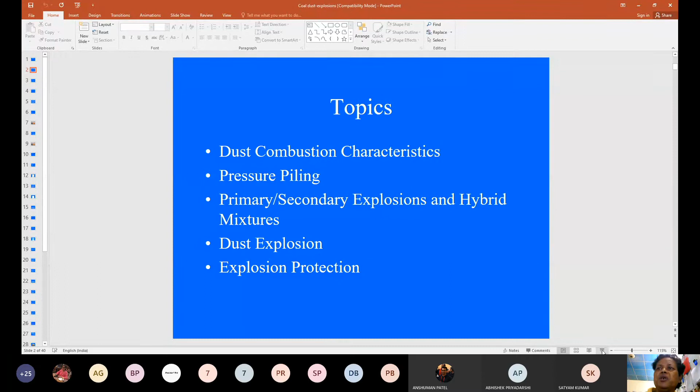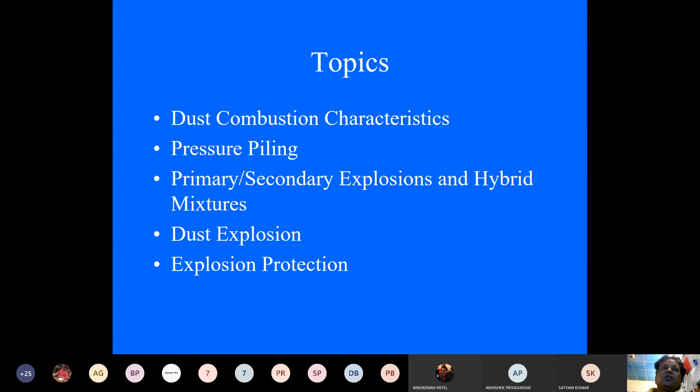So dust explosion characteristics or dust combustion characteristics, pressure piling, then primary and secondary explosions and hybrid mixtures and dust explosion, then explosion protection. So what are the characteristics of dust combustion? Whenever dust is going to be combusted, it has got some characteristics. Before studying dust combustion or explosion, let us define what a dust is. What do you mean by dust? Dust particles. Definition of dust particles.

It is nothing but a finely divided powdered solid less than 420 micron size. If the dust particles are less than 420 micron size, they are called dusts. A finely divided powdered solid less than 420 micron size is called a dust. That is the largest particles that will pass through a standard US 40 sieve.

So in a mineral processing laboratory, you must have seen there are different sizes of sieves. We use sieve shakers to characterize the particle size. So there are different sizes of sieves through which the particles can pass. So in the case of a dust, the largest particles that will pass through a standard US 40 sieve are called a dust. It is the definition of dust.

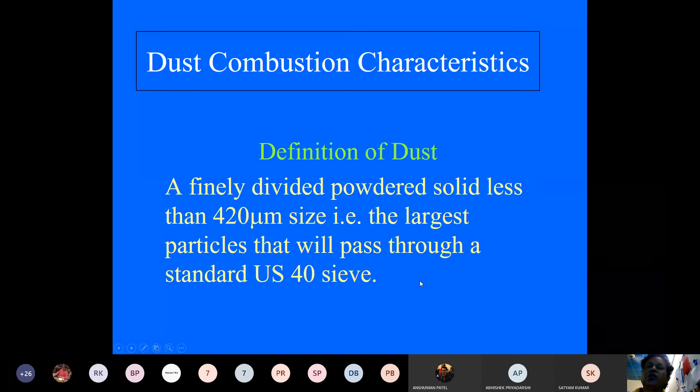A finely divided powdered solid less than 420 micron size means the largest particles that will pass through a standard US 40 sieve are called a dust. This is the definition of dust.

So which dusts can burn explosively? What are the different types of dusts which burn or explode? Every dust is not going to explode. Explosion takes place for a particular type of dust. So which dust can burn explosively? Materials which, if finely divided and dispersed in the mine air atmosphere, can burn explosively. For example, coal dust particles which are very finely divided and dispersed in the mine air atmosphere can burn explosively.

So the different types of dusts which burn are, first, your organic materials like coal dust. Coal dust is an organic material dust. And there are other types of

metals, many metals like your iron, aluminum, zirconium, titanium. These dust particles are also explosive in nature. They can be combusted. So many metals like your iron, aluminum, zirconium and titanium, they are also explosive in nature.

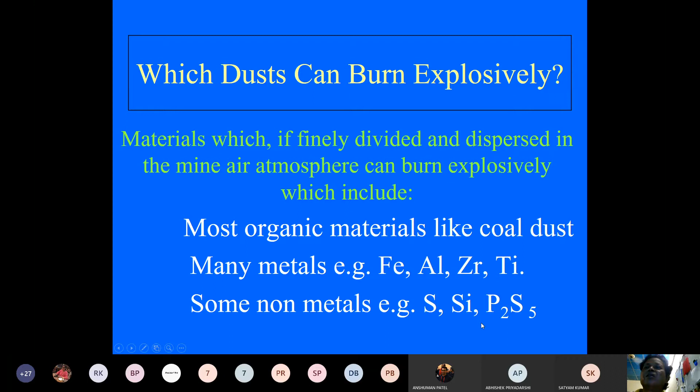And there are some non-metals like your sulfur, silicon, P2S5. They are also explosive in nature. So, what is the nature of dust explosion? Whenever there is a dust explosion, how does it occur? What is the nature of dust explosion?

Generally, they are deflagrations. Coal dust explosions are nothing but deflagrations. That is, the flame fronts propagate into the unburned cloud at a subsonic speed by a combination of heat and mass transfer. So, what do you mean by dust explosion? It is nothing but a deflagration.

Means the flame propagates into the unburned cloud. If the flame started from one end, it will pass on to the other end wherever there is a cloud of dust, and the speed of propagation is subsonic, and it is associated with heat and mass transfer.

So whenever there is an explosion, temperature is going to rise, heating will take place, and there is a pressure change also. Pressure and temperature are going to change in an explosion area. So the maximum pressure is approximately 8 times the normal pressure. The maximum pressure attained by a dust explosion is 8 times the normal atmospheric pressure.

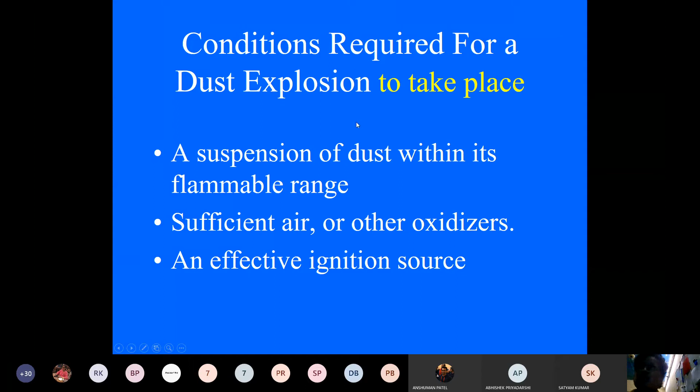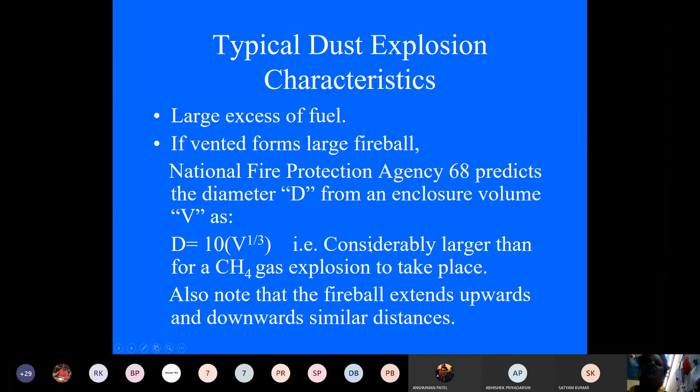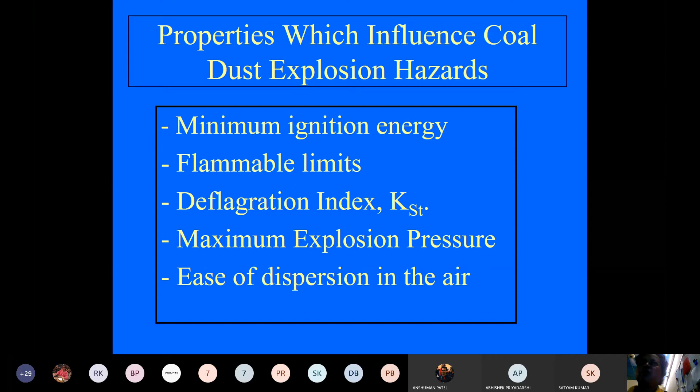Then ease of dispersion in the air. The coal dust should be easily dispersed in the underground coal mine atmosphere. If these characteristics, properties are there, then coal dust explosion hazard will be there in your mines.

So let us see what is the minimum ignition energy needed for the coal dust explosion to take place. The minimum ignition energy of a coal dust cloud depends on many factors, including coal dust particle size and chemical composition of the coal dust. So the coal dust may not be fully coal dust itself. There may be some associated dusts also, like stone dust.

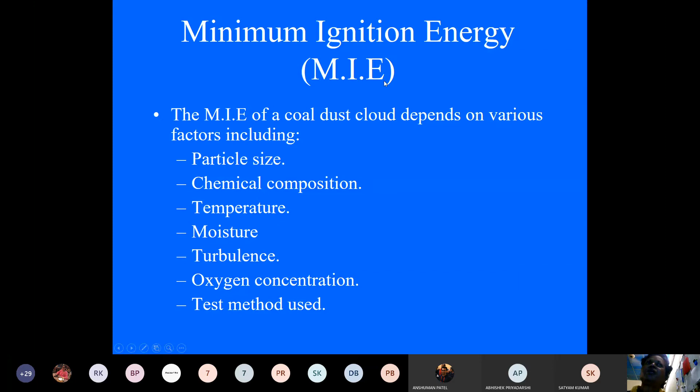So chemical composition of the coal dust, temperature of the mine atmosphere, moisture content in the coal dust, turbulence, very important, whether the dust is stable floating in the mine air or it is just fluctuating from one place to other place, and oxygen concentration, how much oxygen is there inside the mine atmosphere. These are the factors which influence the minimum ignition energy.

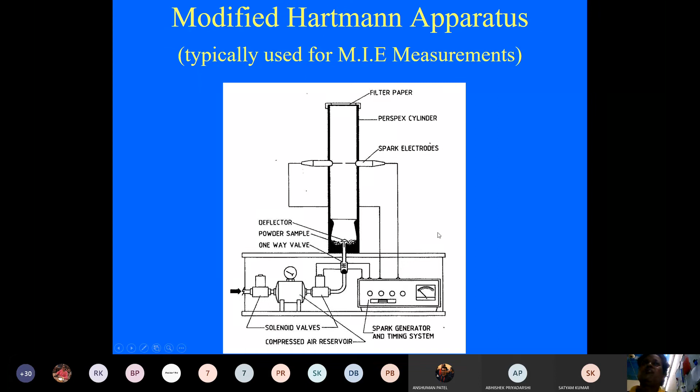So from this experiment, you can determine or measure what is the minimum ignition energy necessary for the coal dust particles to explode. This equipment is called the modified Hartmann apparatus, and the minimum ignition energy is calculated by performing this experiment. So this is the principle of action of the modified Hartmann apparatus.

So what is the effect of particle size on minimum ignition energy? In general, coal dust with particle size above 400 microns will not ignite. If the coal dust particle size is more than 400 micron, or 0.4 millimeter, bigger particles are not going to be ignited; they cannot be exploded. If the particles are greater than 0.4 millimeter diameter, dust explosion will not occur. Remember this size.

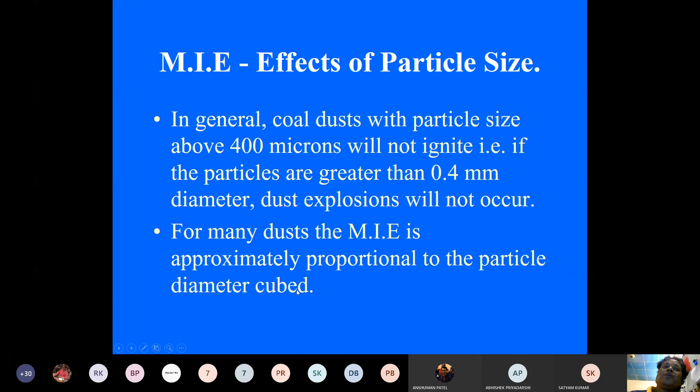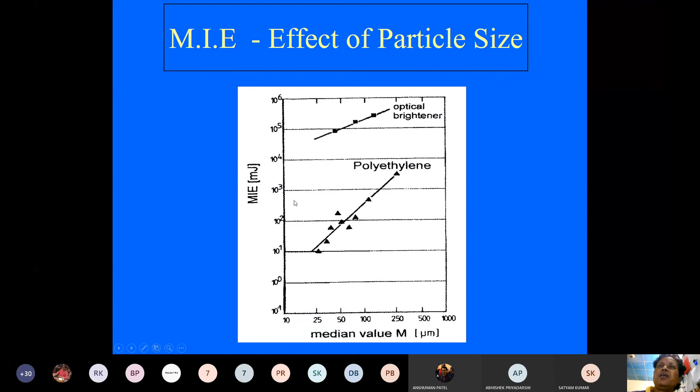For many dusts, the minimum ignition energy is approximately proportional to the particle diameter cubed, that is, particle diameter to the power 3. So this is the graph you obtain for the effect of particle size on minimum ignition energy. On this axis is minimum ignition energy, on this side the median particle size in micrometers, and you get a curve like this.

So what is the effect of temperature on minimum ignition energy? In the laboratory, experiments are conducted at different temperatures: ambient, meaning 25 or 26 degrees, then 50, 90 and 180 degrees centigrade. Lycopodium dust is used in the laboratory to determine the minimum ignition energy. At ambient temperature, the minimum ignition energy necessary is 90 millijoule.

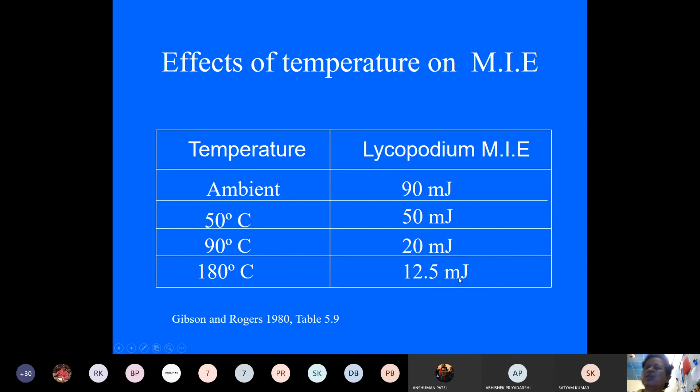At 50 degrees centigrade it is 50 millijoule, at 90 degrees centigrade it is 20 millijoule, and at 180 degrees centigrade it is 12.5 millijoule. So as the temperature increases from ambient 25 degrees to 180 degrees centigrade, the minimum ignition energy decreases. At a higher temperature, you need less energy to ignite. So this is the relationship between minimum ignition energy and temperature.

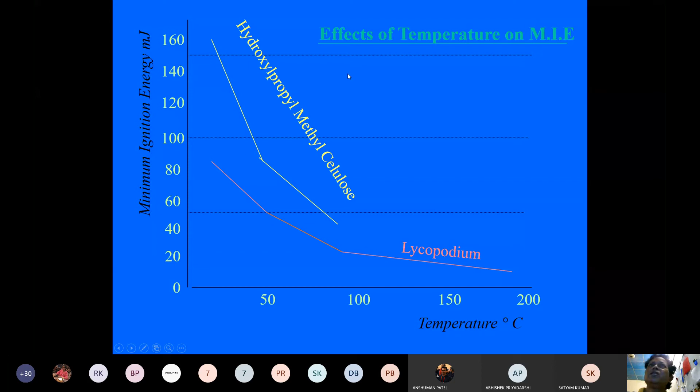So as the temperature is going on increasing, the minimum ignition energy is going down, decreasing. This is the relationship between temperature and minimum ignition energy. That is the effect of temperature on minimum ignition energy.

Then what are the effects of moisture? You know that moisture is present in the mine atmosphere, in the dust. The coal dust is clouded because of the moisture content in it. So if the coal dust contains moisture, what will happen? If in the coal dust particles you increase the moisture content, it will increase the minimum ignition energy value also. If you increase the moisture content, you need more minimum ignition energy.

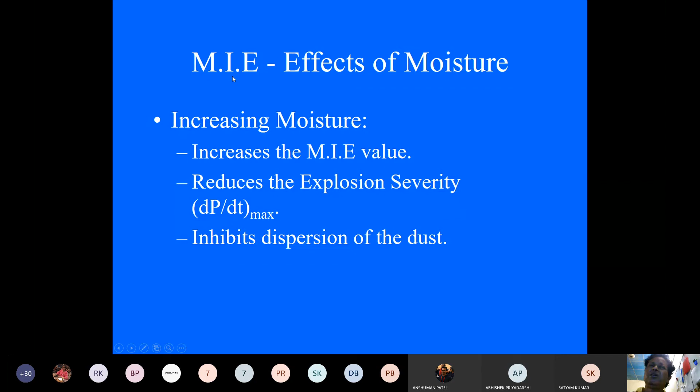It will reduce the explosion severity. If moisture content is increasing in the coal dust particles, it will reduce the explosion severity, and it inhibits dispersion of the dust. It will not allow the dust to disperse. That is why explosion severity will be less if there is more moisture. This is the relationship between minimum ignition energy and moisture.

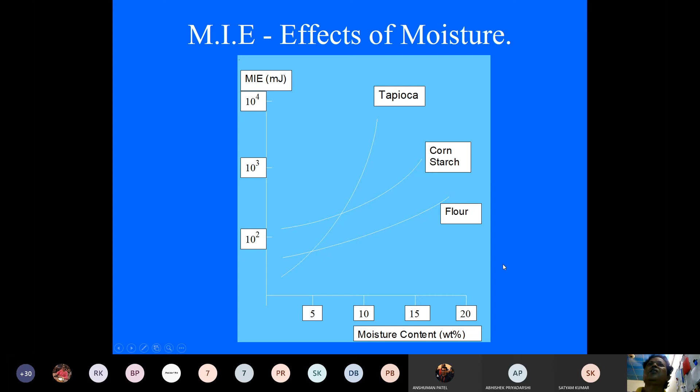So what is the effect of turbulence? I have told you that if the dust is not moving, fixed at a particular place, that is called a fixed dust. But if the dust is moving hither and thither, up and down, right and left, forward and backward, then turbulence is there. The dynamic dust. Dust is dynamic in nature. It moves from one place to other. That is the turbulence of the dust.

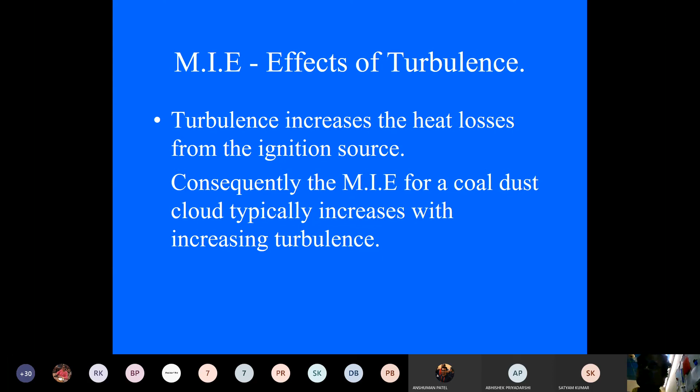So what is the effect of turbulence on minimum ignition energy? If the turbulence increases, there will be heat loss from the ignition source. That is why if the dust is in a turbulent stage, the minimum ignition energy will also increase. If turbulence increases, there will be heat loss, so you need more energy to get the dust ignited. Consequently, the minimum ignition energy for a coal dust cloud typically increases with increasing turbulence. This is the relationship between minimum ignition energy and the turbulence.

So then, what is the relationship between minimum ignition energy and oxygen concentration? You know that oxygen is necessary for the ignition to take place. Without oxygen, the coal dust is not going to be ignited. Three conditions are to be fulfilled for the explosion to take place. One is coal dust in a suspended stage should be there. Second, oxygen or an oxidizing agent should be present. Third, an ignition source should be there for the explosion to take place. So what is the relationship between minimum ignition energy and oxygen concentration?

Most coal dusts will not burn if the air pressure is reduced below 50 millibar. If the air pressure is less than 50 millibar, coal dust is not going to burn, not going to get fired. So you need a certain amount of pressure for the coal dust explosion to take place. If it is less than 50 millibar, there will be no explosion.

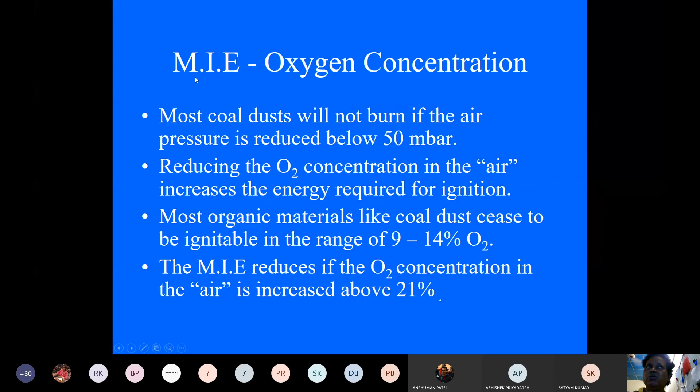It cannot get ignited. You need more oxygen for the ignition to take place. Therefore, the minimum ignition energy reduces if the oxygen concentration in the mine air is increased above 21%. Oxygen level should be 21% in the mine atmosphere for the explosion to take place, or the minimum ignition energy necessary will be reduced. For minimum ignition energy necessary for the explosion to take place, there should be a 21% oxygen concentration in the mine atmosphere. So this is the relationship between minimum ignition energy and oxygen concentration in the mine atmosphere.

So this minimum ignition energy testing is done, measured in the laboratory by Hartmann apparatus. This is measured by a standard which is called the ASTM standard. What is ASTM? American Society for Testing and Materials. So the coal dust is to be tested in the laboratory as per the standard to measure the minimum ignition energy of coal dust.

It suggests that 3 different electrical circuits will be there, and permits some latitude in the choice of electrodes. So you know that this electrode is necessary for the ignition to take place. By the help of this electrode, you are going to fire the coal dust. For that purpose, you need an electrical circuit. The spark energy will be given by the help of this electrode. A fire will be generated for the coal dust to ignite. This can result in significant variability between test laboratories.

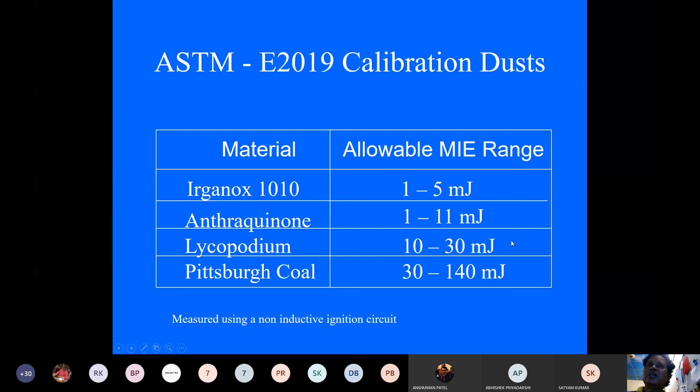So in the next class, we are going to discuss the flammable limits. Today, we have studied coal dust explosion in the mining environment. This coal dust is a very, very dangerous dust in the coal mines. If there is coal dust present in your mine atmosphere, it will affect the health of the people working in the mines. They will develop lung diseases like pneumoconiosis. If they inhale the coal dust through their nose, it will go to the lungs and be deposited there, and people will suffer from the disease whose technical name is pneumoconiosis.

So that is why coal dust is a very dangerous dust in the mine atmosphere. Not only will it affect the health of the people, but there are chances of coal dust explosion. If three minimum conditions are fulfilled, presence of oxygen, an ignition source, and coal dust suspended in the mine atmosphere, then there is a chance of coal dust explosion in the mines. That is why the dust is suppressed by spraying water in underground mines, and the coal dust is neutralized by spraying stone dust. So in the next class, we'll study stone dust also. What is stone dust? What is the function of stone dust in mining? That we are going to study in the next class.